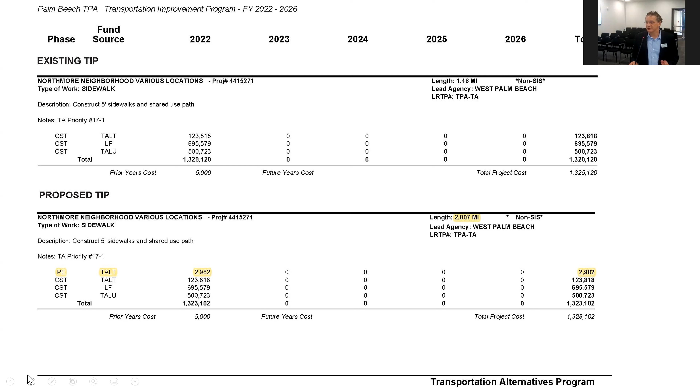And with that, that's the conclusion of the presentation, and I'll take any questions at this time, and we're looking for a motion to recommend adoption of Amendment 2.

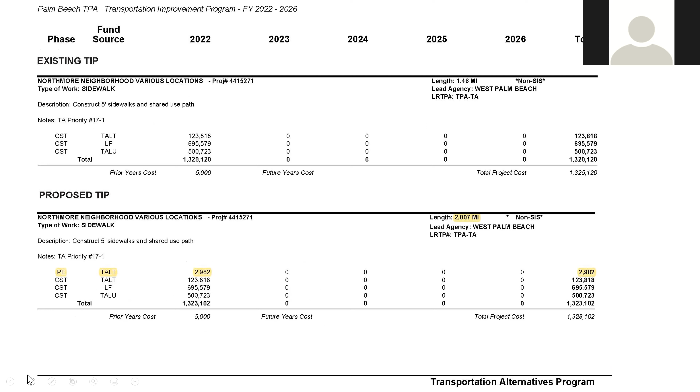Okay, that was it. Thank you so much. You're welcome. Any other raised hands? No, Madam Chair.

Hearing no further discussion, I have a motion by Vicky Katanis and a second by Alex Hansen. We're going to do this vote by roll call. Margie, please call the roll.

The motion on the floor is to recommend adoption of Amendment number 2 to the TPA's fiscal year 22 to 26 TIP as presented. Before I call the roll, please remember to unmute your microphone so your attendance can be counted, and please respond by saying yes or no when I call your name.

Jim Bell, yes. Maria Tahara, yes. Jerry Dunmeyer, yes. Richard Pereira, yes. Kenny Wilson, yes. Chang Jin Lan, yes. Jamie Brown, yes. Michael Mara, yes. Aramis Cabrera, yes. Will Hicks, yes. Brian Davis, yes. Anna Bulowska, yes. Aaron Hoffman, yes. Terrence Bailey. Christopher Marsh, yes. Joyce Kai, yes. Vicky Gatanis, yes. Kim Delaney, yes, thank you. Patrick Bartholomew, yes. Alex Hansen, yes. Christine Perdoma, yes. Modisa Malturk, yes. Kara Ferris, yes. It passes unanimously, Madam Chair.

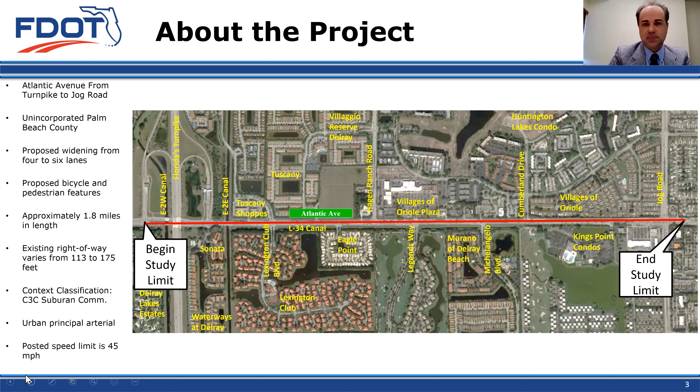This was the typical section we originally presented in June to the TPA board and the TAC: 6 lanes divided with a 22-foot median, 11-foot lanes, 7-foot buffered bicycle lanes, a 10-foot sidewalk on the south side, and an 8-foot sidewalk on the north side. There's also a guardrail on the south side to protect from the canal located there, the L34 canal. One thing I want to point out is that right-of-way acquisition will be needed on this typical section on both sides. From the Lake Worth Drainage District, they're requiring 75 feet to be maintained for the right-of-way.

So with this typical section from Eagle Point to Legends Way, that would be our tightest area where we'd likely be needing to box the canal, as well as a small section near Michelangelo Boulevard for about 370 feet or so.

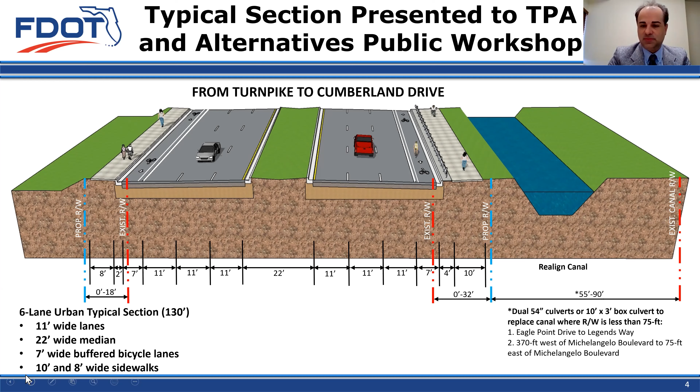Next typical, please. So this is the next section from Cumberland to Jog Road. There's a ditch on the south side within this segment. So we would be looking to pipe that ditch, and we are coordinating with Lake Worth Drainage District, and they are okay with us doing that within this section.

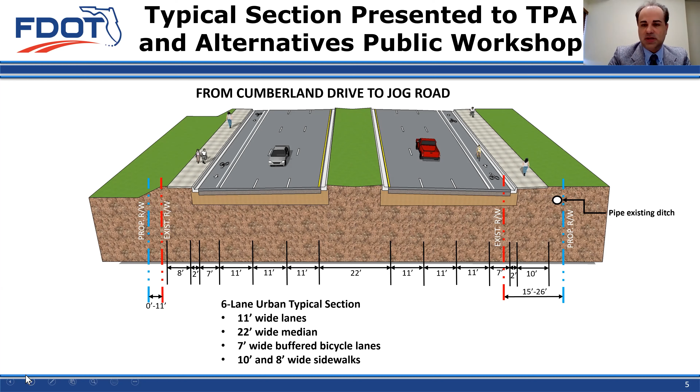So the typical section elements are still the same as the previous one. It's really just how we treat the right-of-way acquisition here on the south side, where we don't have the canal. We're now just having the ditch.

Next typical. So some of the feedback that we received from the TPA board was to look at wider pathways or potential shared use paths on both sides and physical separation of bike lanes along the corridor.

Next slide. So following the TPA board meeting, as I mentioned, we held a public workshop, one using the GoTo platform on June 28th and then in person on June 29th. Some of the key feedback we obtained was concerns regarding noise with additional traffic or added lanes, impacts to driveways on the south side where we have some community entrances, as well as some U-turns and access at Eagle Point, where residents feel it's difficult to get into the neighborhood with vehicles making U-turns and so forth.

But one of the key things I do want to highlight is the physically separated bike lanes that was requested from Commissioner Sachs, and that's kind of in line with some of the feedback, as I mentioned, from the TPA board. Next slide. So taking a look at some of the ideas that we came up with, and we coordinated this with some of the TPA staff, and we felt these were typicals that we could present.

This is the first one. This is having shared use paths on both sides of the corridor. You'll notice there are no on-street bike lanes on this, so all bicyclists and pedestrians would be using the shared use paths on both sides.

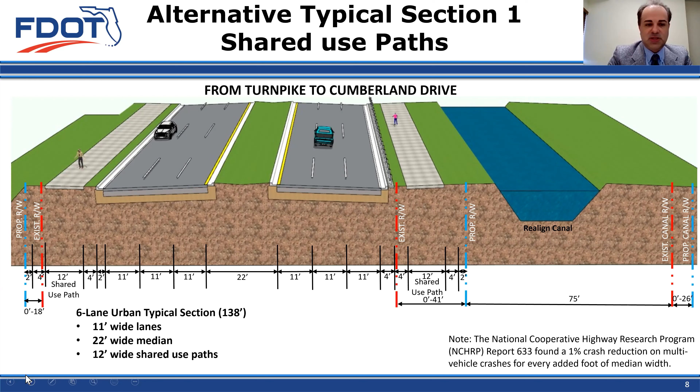So the next typical section that we looked at is physically separated bicycle lanes. Here what we do is we have a 3-foot buffer between the outside travel lane and the bicycle lane, and within that 3-foot buffer there's a 2-foot physical raised separation. That's going to provide some of that physical separation for vehicles. If they're traveling, there's going to be something that they would bump into without going into the bicycle lanes.

So that's a 3-foot buffer, 2 feet of that is physically raised, and you would have a 6-foot bicycle lane. This is on both sides of the corridor, and in addition we would include 10-foot sidewalks on both sides as well.

The canal would be similar to the previous one. If we were to hold a 75-foot right-of-way width for the canal, for this typical we'd be looking up to 22 feet, so it's a little bit less than the previous one. We're now at 134 feet overall for the typical section.

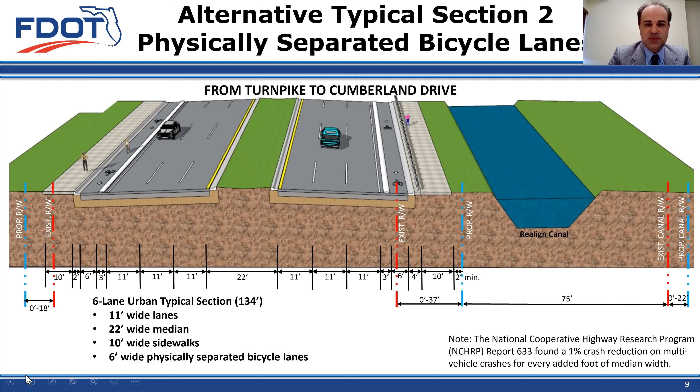Next slide. So this is similar to the first one we presented. This is still having the shared use paths on both sides, but we were able to reduce the width for the canal by putting a sheet pile wall along the north side of the canal. So that 75-foot width we had before, which included a 10-foot maintenance berm on the north side of the canal, we were able to eliminate, reducing the width of the canal by a couple of feet. So overall we took the 75 down to 63, and that now reduces the impacts we would have on the south side into some private properties down to up to 14 feet.

But the rest of the typical section elements would be the same as the first one, where we have shared use paths. These are 12 feet on both sides and no on-street bicycle lanes.

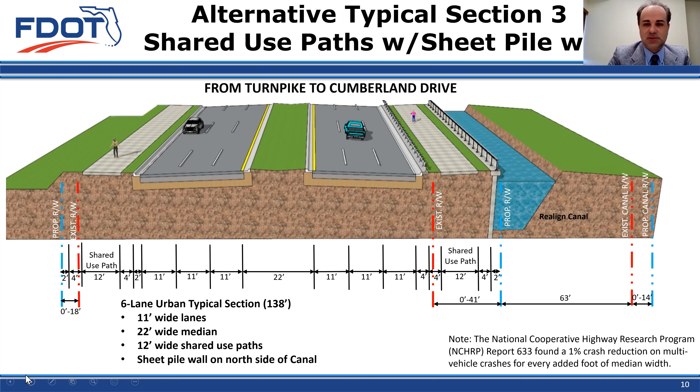So these are some of the mainline typical section challenges associated with some of these concepts. Obviously, additional right-of-way—we're looking up to 4 to 8 feet more compared to the original concept we presented back in June. Potential impacts to some of the privacy walls and landscape buffers on the south side between the canal and the private property, potential impacts to the golf course, as well as Wood Stork habitat and mitigation would be potentially needed if portions of the canal are piped in order for us to avoid or reduce the 75-foot requirement.

Potential increased impacts to the Kings Point Shopping Center over at Jog Road, which would also include parking impacts at Walgreens, and some increased residential impacts between Cumberland Drive and Jog Road as well, which would be generally on the north side.

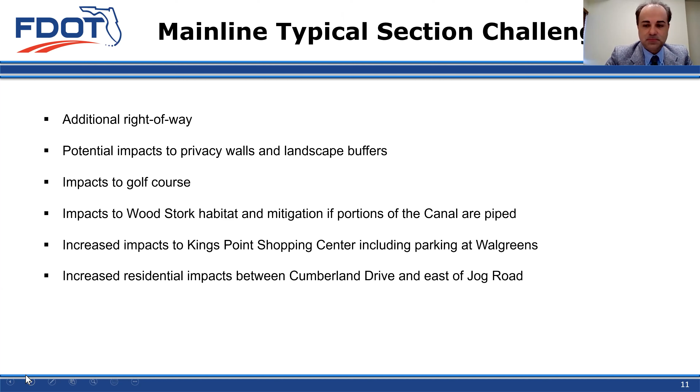So this is a critical area that we're focusing on here, which is between Eagle Point and Legends Way. This is the tightest section within the corridor regarding right-of-way. What we're showing here are these various impact lines, assuming we were to maintain a full 75-foot right-of-way width for the canal.

Now, we have been coordinating with Lake Worth Drainage District for this section, and we're trying to get approval from them right now to end up piping this section. So contingent upon that approval, if we do get that approved by Lake Worth, the impacts that we're showing in here would end up going away. We would just pipe the section—it would be less than 75 foot for the canal, and these issues would go away.

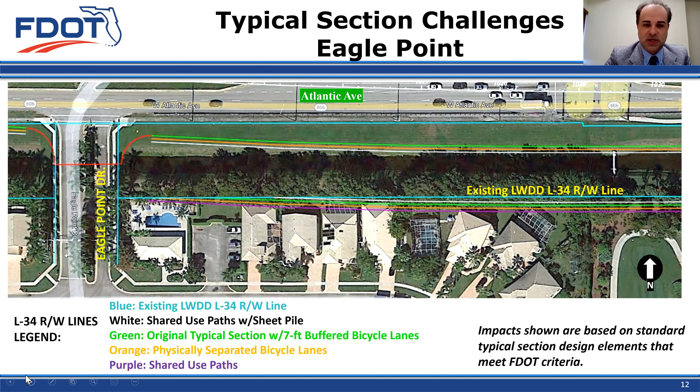Otherwise, these would be the associated impacts for each of the alternatives that we just presented to you. The shared use paths, which was the first concept that we showed, would be the worst one. As you would see here, we would be encroaching on some of the homes and patios and so forth in the Eagle Point community.

So this is a summary of some of the right-of-way challenges that we have. The top table that you see is the concept that we presented back in June. As I mentioned, the Eagle Point to Legends Way segment, you'll notice there are areas within that segment that fall below the 75-foot request from Lake Worth Drainage District, down to as low as 55 feet.

It's typically around 62. So that's the area we're looking to box in, in order to avoid having those impacts that we just showed on the previous slide, as well as the short segment between Legends Way and Michelangelo Boulevard that I mentioned earlier. There was about 370 feet that we would look to pipe the section.

So the table on the bottom left is what we would have regarding the shared use paths. You'll notice almost the entire segment from the E2E bridge to Cumberland is now going to be below the 75-foot requirement from Lake Worth Drainage District. That means they would have to approve piping all of these sections that we're showing here in orange, in order for us to avoid having those impacts on the south side that we discussed earlier, which would be inside the private property.

So not just Eagle Point to Legends Way, which is the first portion we were looking at doing, but it would be almost the entire segment we would need approval for.

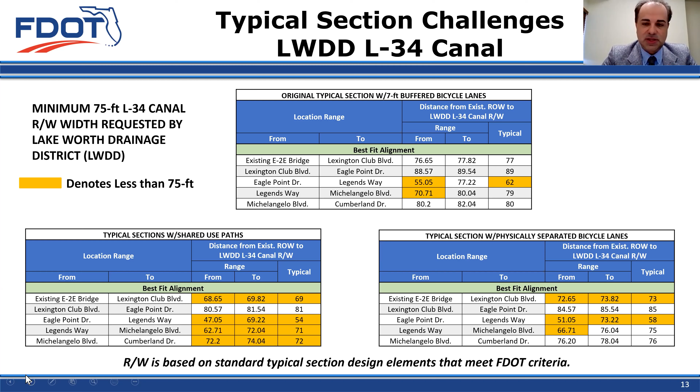So these are some additional challenges we would have at the Turnpike. If we move forward with any of these new typical sections, some key things to point out are the additional widening needed for the bridges.

The first one is the E2E Canal. Our previous concept widened this bridge on the south side, so it would require further widening there. The north side was recently widened to accommodate the right turn lane and an additional through lane at this location.

So we would have to widen that bridge again on the north side. On the E2W Canal, for these two bridges we originally were just going to be striping through, so there wasn't going to be any widening of the bridge.

But with any of these new alternatives, we'd have to look at widening both of these bridges, as well as the associated utility relocations, and coordination and approvals from FGT, since we'd be widening over the FGT line. Overall there are no fatal flaws, but the key thing is there will be a lot of additional costs.

So funding is really the key issue with the additional work that will be done through the Turnpike with one of these new typicals.

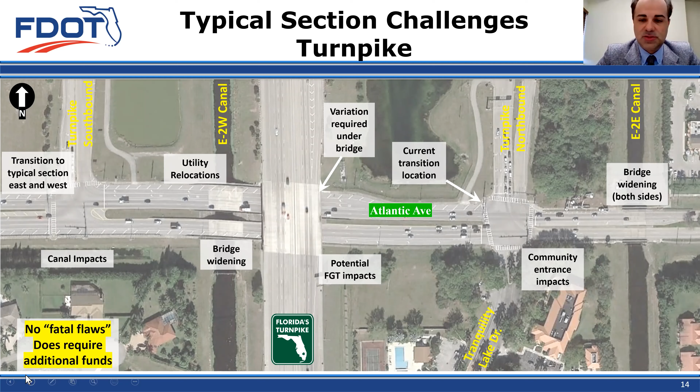Next slide. This is a comparison of all the various alternatives. The no-build alternative is still carried forward as an option in the PD&E study. The 7-foot buffered bicycle lanes is what we presented back in June. You'll notice a lot of improvements here for vehicle safety, traffic flow, and access, compared alternative to alternative. You'll see a lot of yellow dots on the 7-foot buffered bicycle lanes for construction costs and so forth.

As far as costs go, the most expensive would be the sheet pile wall. Putting those walls in would be very costly, so that would be our most expensive option.

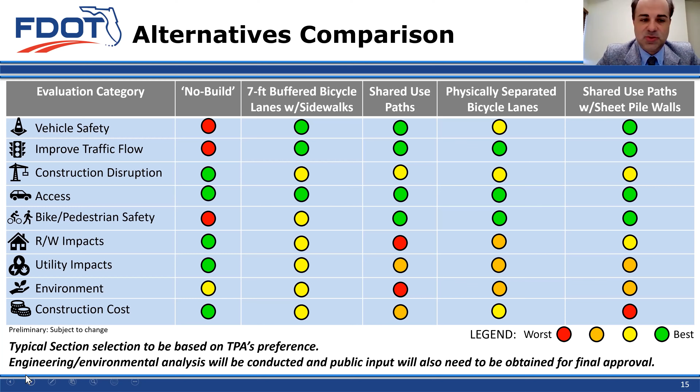As far as bike-ped safety, any of these new three alternatives we feel would be safest for bike-peds. Even the original alternative would be better than what's out there today, but the three new options we presented will enhance that even further. However, there are more associated right-of-way impacts with those alternatives, as well as utilities and so forth.

Next slide please. So the Jog Road intersection - this was something we presented three alternatives for back in June. The partial displaced left turns was the alternative shown to achieve acceptable level of service in the design year 2045, with further coordination with TPA staff as well as internally with the department.

This concept wasn't supported due to additional right-of-way impacts, multiple access issues associated with it, pedestrian safety concerns, and this being an unconventional type of intersection for Florida. It would violate drivers' expectations, as people aren't very familiar with this type of configuration.

So with that, we would still be evaluating two other alternatives: maintaining the existing dual left turns out there today, or expanding the intersection with triple left turns. But we want to point out that neither of those alternatives will meet the acceptable level of service in the design year 2045.

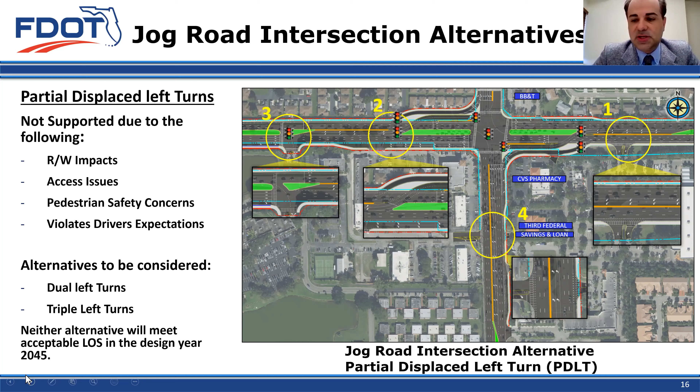With the change in these typical sections, based on what's selected, we're going to have to go back and do some additional analysis. So we anticipate some shifting of this schedule to extend out a few months. We're still going to do our best to target a completion date of summer 2022, but there could be additional months needed based on changes for the newly selected typical section.

With that, there could be some shifts in the phasing for the future phases. The design phase is fiscally funded for fiscal year 2022. Construction is still not funded, but it's a candidate project for fiscal year 2027.

Next slide. With that, Tuk and I, as well as Rudy Gottmari, the consultant project manager, are all here to answer any questions you may have. Thank you.

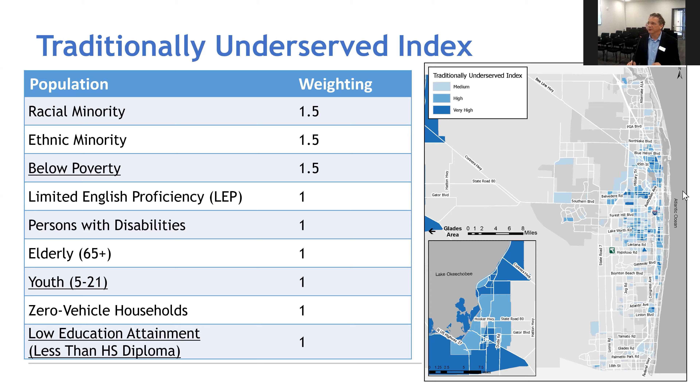These changes cut across all three programs: the transportation alternatives, the local initiatives, and the state road modifications grant programs. So with that, that covers the local initiatives program overview and some of the scoring changes. Now I'll turn it over to Connor, and he'll go over the state road modifications program, which is somewhat new this year. Take it away, Connor.

Thank you, Jason. Before I get started into the actual presentation, I think it's important to provide some background on where we are today with the State Road Modifications Program. This program has actually been around for a few years now, however it's not been a formalized process.

The TPA sought to address this by adding some goals into our strategic plan: to create a scoring system for SRM, and to support applications for the new program. As part of the adoption of the strategic plan, the TAC voted to develop a subcommittee to help inform the formalization of this process. The subcommittee met on September 8th and voted to move forward with the TPA's recommendation, with a few changes which I will touch on later in this presentation.

TPA staff incorporated the recommendations from the subcommittee, and the program is now seeking to host an annual application process similar to TA and LI. For the program itself, it is modeled after the LI and TA programs, and because of this it will follow the same schedule that Jason highlighted earlier.

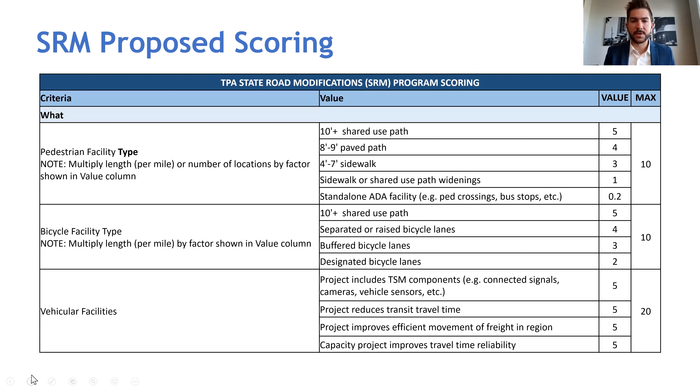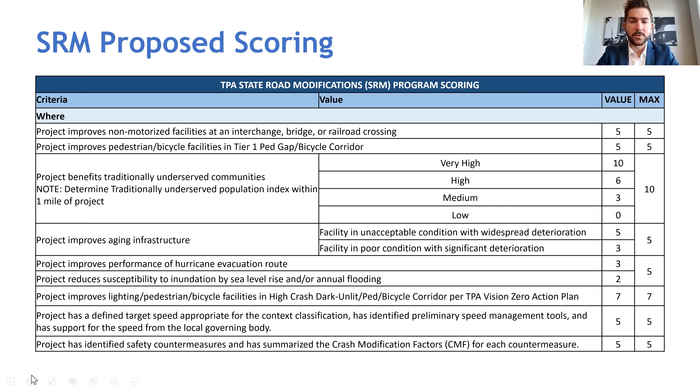Next slide, please. Here you can see the incorporation of the traditionally underserved metric, but you can also see the scoring diverge a bit from the LI scoring to better match the goals of SRM, the program, and the direction of our subcommittee. We have incorporated both target speed as well as crash modification factors into the scoring, which you can see in the bottom two rows there.

And if you are looking for more information on the funding programs that we have here at the TPA, you can visit palmbeachtpa.org/funding. That is all I have for you today. Thank you.

Staff, are there any public comments on this? No, Madam Chair. Okay, I need a motion to recommend approval of the 2022 LI and SRM program guidelines and scoring system, and then I will open the floor to discussion.

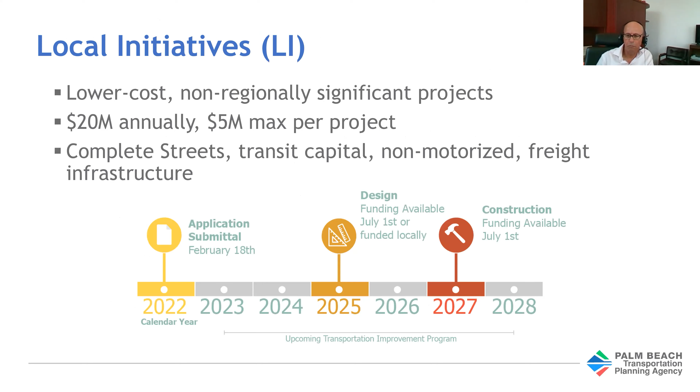I had a question about whether we could add, give points, in the LI application to projects that fill gaps in a sidewalk or pathway system, helping to create a connected, longer system, and then give more scores based on the length of the entire system that will be connected as a result of those gaps being filled. I'm working on a project here in Palm Beach County that will be extensive, and it fits that category. We have quite a few gaps that we need to fill in the corridor, but once we do that, we'll be able to provide a fully connected pathway that would connect residential to shopping and parks and entertainment, as well as provide a fully connected, maybe 3-mile long corridor. So I wonder if this is the time, and whether that's a good idea, if the group feels it's a good idea to add that as one of the criteria to be scored upon.

And also I had another question, since I have the time to speak, about the SRM. Is this a unique program for Palm Beach TPA, or is this a statewide program? Also I see that TPA can have the option of applying for up to 5, submitting up to 5 applications. The question is, I understand that municipalities and or county each will be applying for corridors within their jurisdiction. So what's the jurisdiction for the TPA? So that will be anywhere. And would there be any coordination between them and the jurisdiction where that project is located? That's it, thank you. I think I asked several questions.

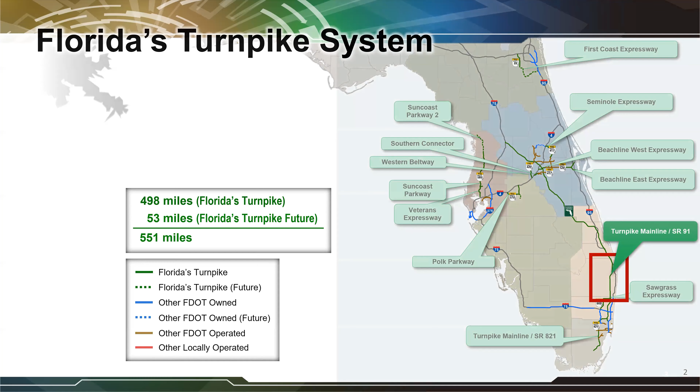Florida's Turnpike's mission is to help meet the state's growing transportation needs, ensuring value to customers, protecting investors, and managing this Turnpike system in a business-like manner. With that mission in mind, the projects we'll discuss today support the Department of Transportation's vital few core areas, which are to improve safety, enhance mobility, and also inspire innovation.

According to the Turnpike bond covenants, we have to pay for operations and maintenance costs first. This includes costs to collect and process toll payments. Then we have to pay off the debt on those bonds that we issue to construct major projects. It should be noted that due to our very high credit rating, the Turnpike has historically benefited from some of the lowest borrowing costs in the toll industry.

Then we'll reinvest that revenue into renewal and replacement of pavement, such as resurfacing projects or other kind of recurring improvement costs. Finally, we'll use the remaining funds to pay for capital improvements, such as widening or interchanges.